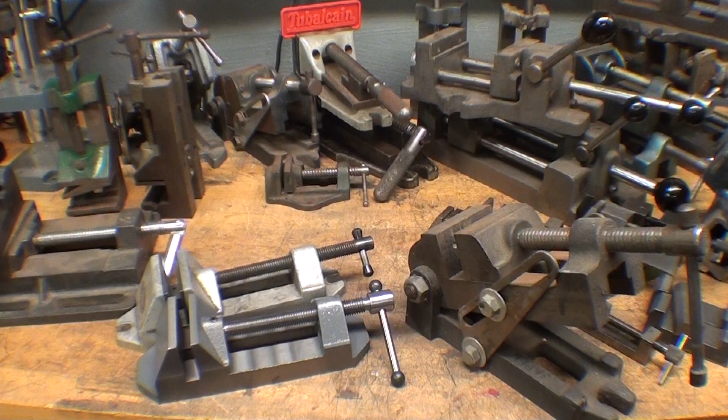Now this video is not meant to be a bragging session. If you think it is, turn it off rather than discourage me on it. I'm just going to yap. There'll be no chips made, but I'm talking about my...

Well, it's not really a collection, but I guess you could say that it is - I have 25 or 30 drill press vises, and I only need one. This was all brought about by my recent videos where I made the Struck Casting Specialties vise. I brought these out because there are so many different designs and sizes, and what I'm going to do here is just muse about them and elucidate the different types of vises that I have, and why I have them, although that will make no sense to you.

But, I've said many times, a man with many vices.

So let's get on with it, and I think I'll start with the larger vises so I can get them off the table. Now there are duplicates here too - there's always duplicates. Furthermore, if I went to a sale today or tomorrow, I would probably buy yet another one if it was cheap, because I am incredibly cheap and I'm not about to pay any money. None of these were purchased new - I don't ever buy anything new.

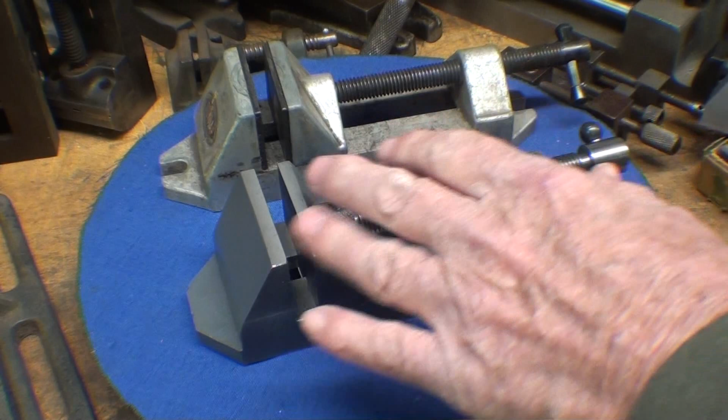Let me talk about the Casting Specialties vise first here, if I can get it out of the way, and I know I'm beating that subject to death, but I think most everybody in the Western Hemisphere has seen these three videos where I built this vise. But in the follow-up video, I discovered that I still had this Dunlap vise. Also, I told you recently that I had to go to the doctor, and the doctor examined me, and then he sat down at the desk.

He says, Mr. Peterson, I gotta tell you, you got a disease. You got Dunlap's disease. And I said, what? Is it serious? And he said, well, I don't know how serious it is. I said, what is Dunlap's disease? He said, well, your belly Dunlapped over your belt. Rim shot.

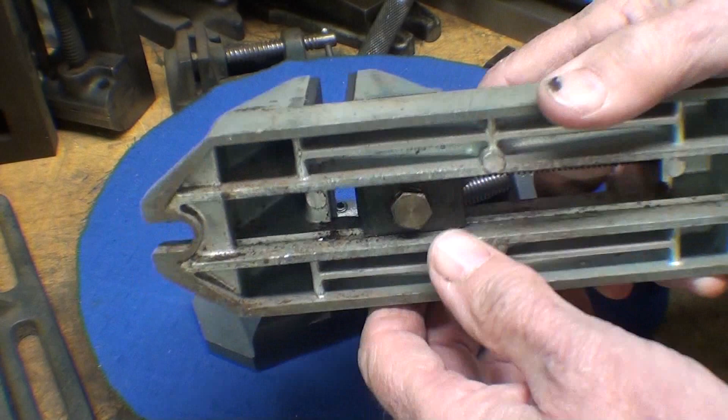Well, why am I showing you this cheap die-cast vise? This is zinc. I mentioned it in the other video, and you can see the ejection pin marks here. This is a repetition, really, but this vise could not be any more identical to this vise by Struck in appearance and dimensions. They are absolutely the same.

So I brought that up in the other video - which came first, the chicken or the egg? Did Mr. Struck copy this, or did Dunlap copy the Struck vise? I don't know. So anyway, I won't say any more about this, but I've had several of these over the years, and one of them was bent.

It was bowed. If you laid a straight edge across the bottom here - where's a straight edge? I don't even have one. Got 100 rulers and none at my... There was a great big bow there because someone had tightened it up so tight that they caused it to bend. It was Bubba, of course.

Notice that they probably knew that was going to happen and provided it with a very short little stubby handle where you couldn't get the leverage. But this would suit somebody in a small shop that does some work. I don't know if they make them anymore. Sears often sold Dunlap tools years ago as one of their cheaper lines, not the Craftsman line.

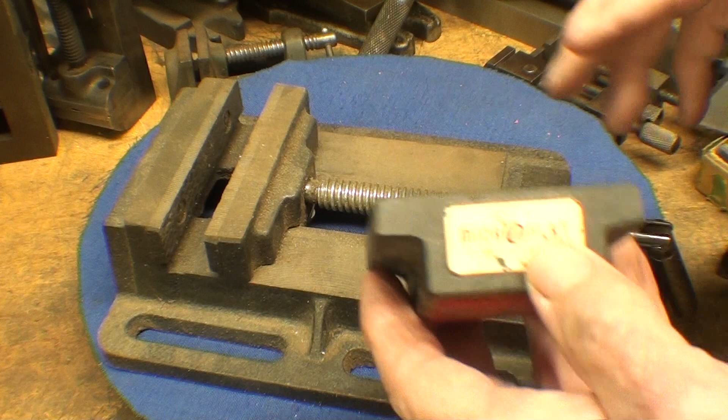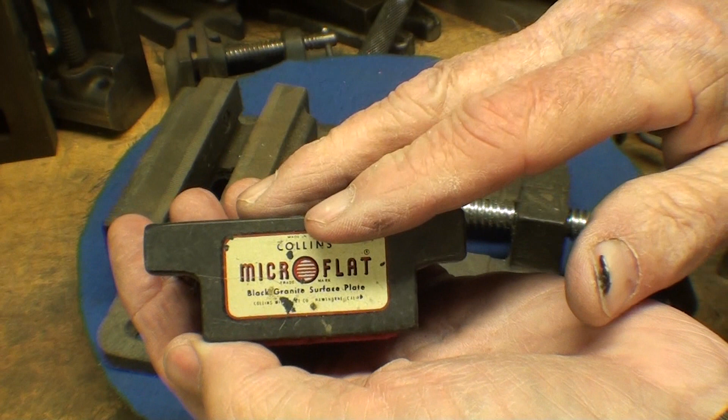But both Tom and Adam Booth showed one of these recently. I've had one of these kicking around for a long time. I didn't really know what it was. It's black granite, but I believe it's just meant as a paperweight, an advertisement for this particular company, Microflat. I didn't know there was an actual use for it - I just thought it was a desk piece, and that's what the felt is for.

And the 3 or 4 times I darn near threw it away. Well, enough on that, that's a non sequitur.

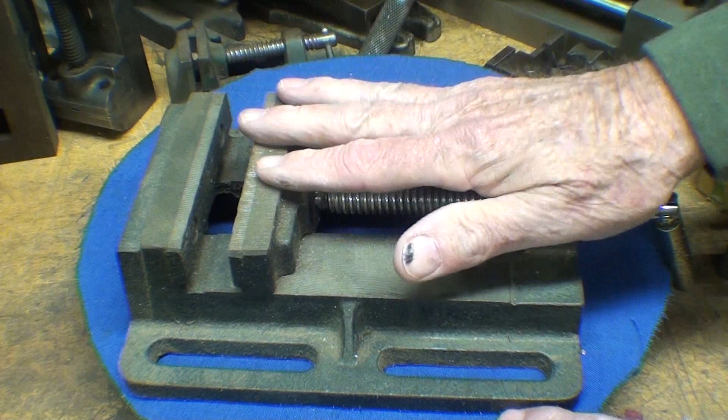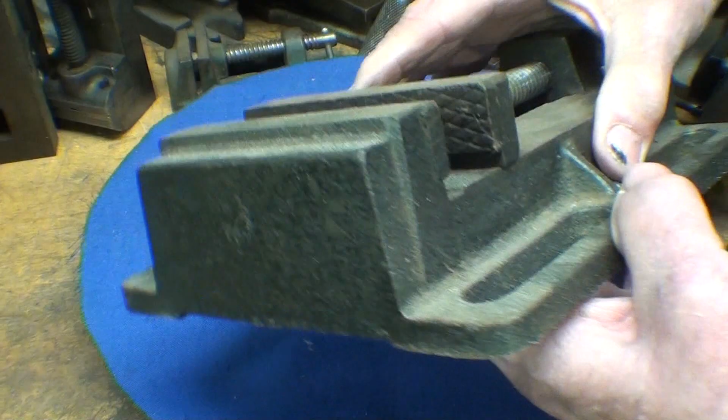You see these vises in every box store. They're Chinesium - I'm taking that word from AVE, pretty clever, but I don't like to steal his thunder. It's a 4-inch vise with an Acme screw and a nice handle, so that would be suitable. I think this is a $15 or $20 vise, and it's even got replaceable jaws. I hate it myself, but I haven't had the nerve to throw it away yet.

I only have a couple other Chinesium vises, so I'll show those and then we'll move on and get these heavy ones off the bench. This is a 4-inch, pretty much the same as a 3.5 inch, and that one still has the price tag on it from when I bought it at a garage sale.

You may remember this from another video where I did a job with it - these are tilting vises. When I got done with the job, the work was scrapped because this vise wasn't square, or I forgot, or maybe the protractor portion on it was no good. So this is an absolute piece of garbage. They obviously didn't check it at the factory, and they didn't care or didn't know any better, but it really is a piece of junk they should be ashamed of.

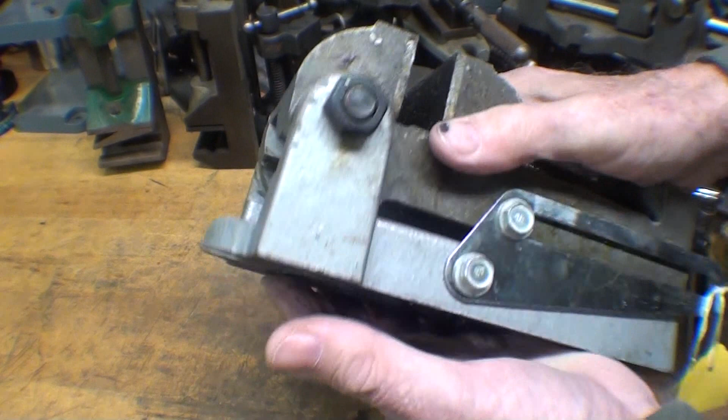I've never checked this one for accuracy. This has about a half inch diameter screw, and this one is larger, probably 5/8, but it may well be metric too. But if you want a tilting vise fairly cheap, those are the ones you can get. If you bought an American one, it would cost a king's ransom.

Sometimes you find these vises also on a 2-axis setup - I'm going to show you one of those later, American made though. Anyway, I don't like these. This one definitely is going to a flea market or tool sale. I've got to get it out of here before I use it again.

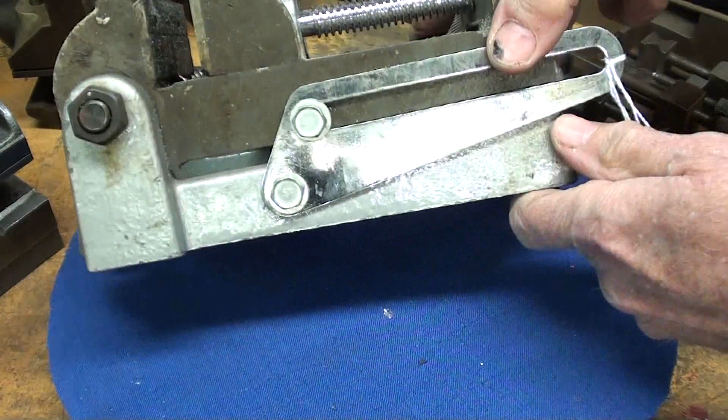One other thing on this vise - they did know how to make it pretty. They took the time to plate this piece, plating the screw and the handle. So on the store shelf, for the uninformed, that looks like a vise they maybe had to have, and it would have been priced right.

Okay, the ubiquitous Palmgren vise - I thought I had a bunch of these in this size, but I don't. I really only have one in the genuine Palmgren brand, and it's 2.5 inch, and this really is a wonderful little vise. A lot of people modeled homemade vises, or other companies copied this because it's such a nice one. I always liked Palmgren. I'm not sure if they're still made in this country.

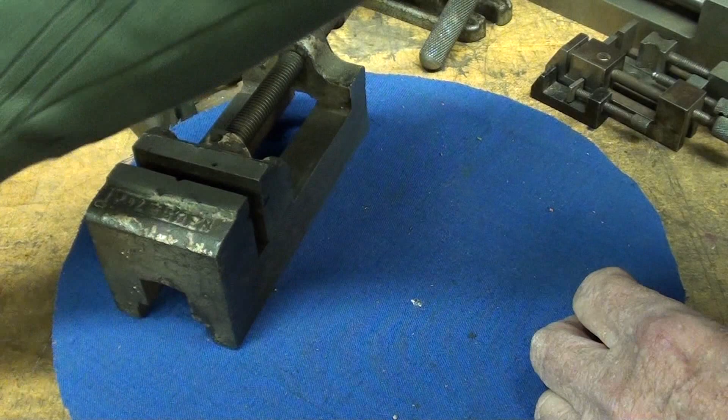And here is a vise I've had for many years - it's Japanese, old enough to be Japanese, not Taiwanese, and this is very well made. In fact it's one of my very favorite vises here in the Tubalcain shop. Let me say a couple other things about Palmgren, and some of this is a repeat - I know it is. I found it's necessary to repeat some things because people don't go back and watch older videos, and I have constantly new subscribers, new viewers.

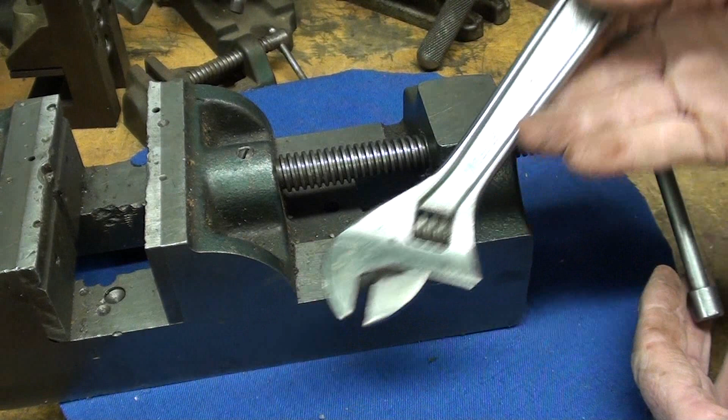Probably the same thing underneath this fixed jaw here, and that's why that jaw has an angle on it, so they didn't have to get into the corner and worry about that, because they were making these by the thousands. And this is a heavy vise, and it's really nice.

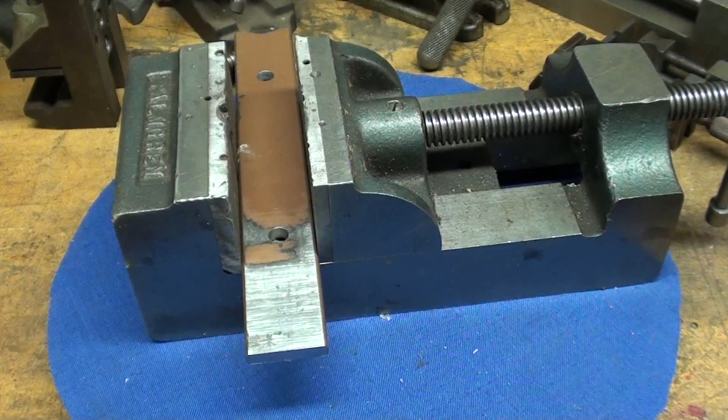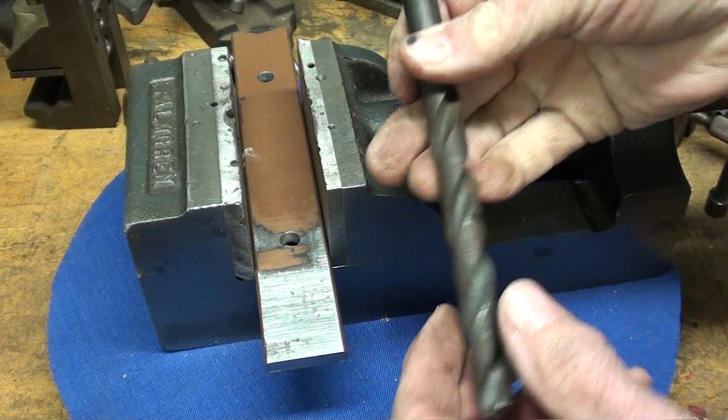In my many long years of experience in a school shop, I have seen kids - this is kind of humorous if it wasn't so pathetic - drill through relatively thin work like this, through the work, through the vise, and then through the drill press table. So even though it's 1/4 inch stock, they drilled a hole that was 3 or 4 inches deep and left a path of destruction behind them that is still there wherever that drill press is. Still got a big hole in it.

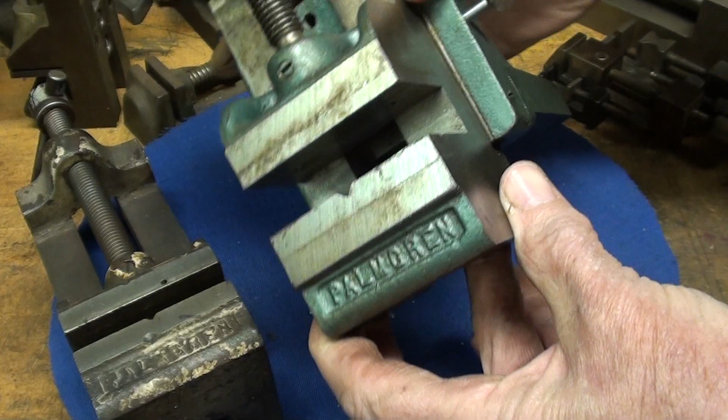Some of you may own this Palmgren milling attachment for your lathe, and they essentially used their ubiquitous vise here and adapted it for that, so they didn't need to make a totally new vise. Parts bin engineering is what I call it. Although this is a nice attachment, I'm not really criticizing it.

I like this Palmgren vise, and it's a little bit bigger than the other one. It is 3 inches, and it's got the lugs on the side so you can bolt it down. Nicely made. I liked it so much I got 2 of them. Or I guess, no, I'll take that back. I liked them so much I got 3 of them.

This particular one I can hold in the bench vise and do small work on it, and the jaws, of course, are not going to mar the work because they're smooth jaws. And those are nice. They've never been - well, I started to say they've never been drilled, but this one has a couple pecks in it. I didn't do it. I didn't do it.

They plated this one, and this one is not plated. Notice that this one is not cast with the Palmgren name, probably because they sold these to other companies and they could put a decal on here, Craftsman or just about anybody that wanted to buy them as their own brand. So I think that's why I'm deducing that they took their name off of it. And I do like the hammer tone paint.

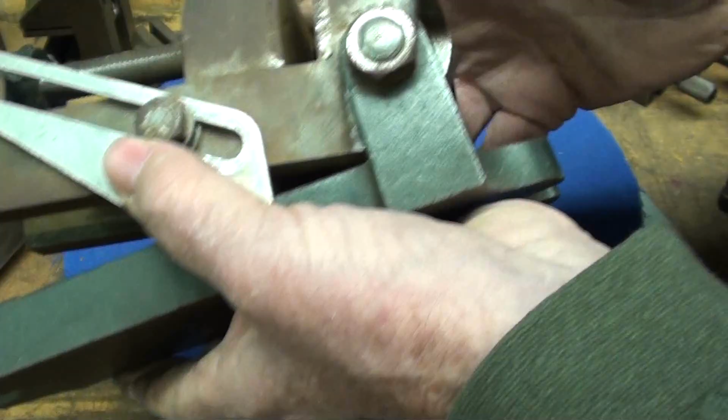But what is not nice is that, if I can find it on here, oh, they got a protractor on there, but it's bordering on the worthless because it's small. It's too small. The larger the protractor, the more accurate it's going to be. So I would like to have a protractor that's 4 inches in diameter, but of course there's no room for that, and it would be only semi-accurate and get you in the ballpark. You would use a Starrett protractor if you wanted real accurate settings.

Now, a lot of people copy that vise as well, and here's one that is Chinesium.

Got the heck drilled out of it here. Even there, you know, how'd they get holes over there? And this protractor is still small, but it's applied in a different manner. It is cast iron and certainly usable, and they plated that screw for some reason. Oh, here's a point I'm trying to make: in this case, they started with smaller stock. The diameter here is smaller than the diameter of this, and there's still one other one here.

I guess I'm not done with tilting vises here. I thought I was, but I bought this a couple years back at an auction. It was $15, more than I wanted to pay. And really what I wanted - I don't care two hoots about the tilting mechanism. I was going to take it apart and throw it away because this little vise is absolutely darling. And I wanted to use it just as a general - it's 1.5 inches. And I know that Palmgren probably made that one that small, but I've never seen it.

Palmgren had, maybe still does, a complete catalog with vises and other work holding devices, rotary tables and things like that, so they aren't a one-line company. They were pretty awesome. I guess they're still in business.

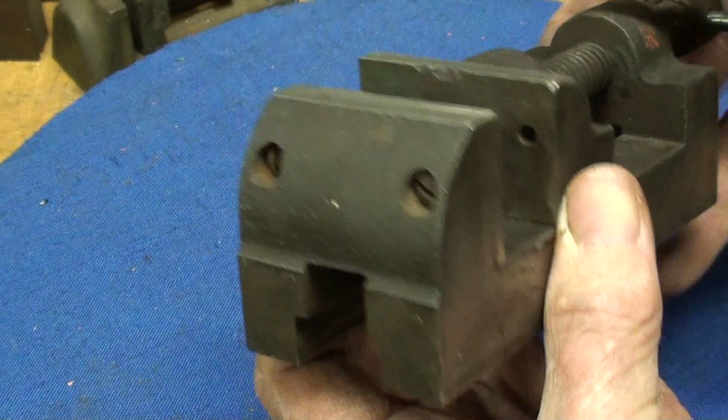It is missing one of the jaw plates, and someone said, well, you're a machinist, make one. Never got around to it. The shoemaker goes with holes in his shoes, you know.

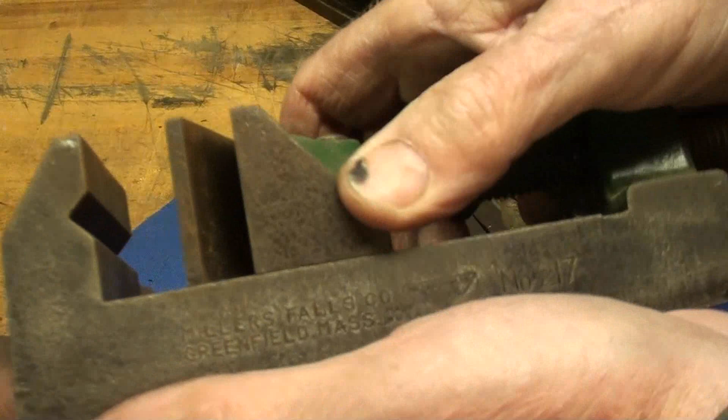Here's two identical 2.5 inch vises, and they're made by Miller's Falls, or at least one is marked as such. Some of you may not be familiar with that brand, but boy, they made everything from micrometers to all kinds of woodworking tools, and yet they're long gone now. Notice the groove here, right in the casting, not in the jaw, and it has a swing jaw.

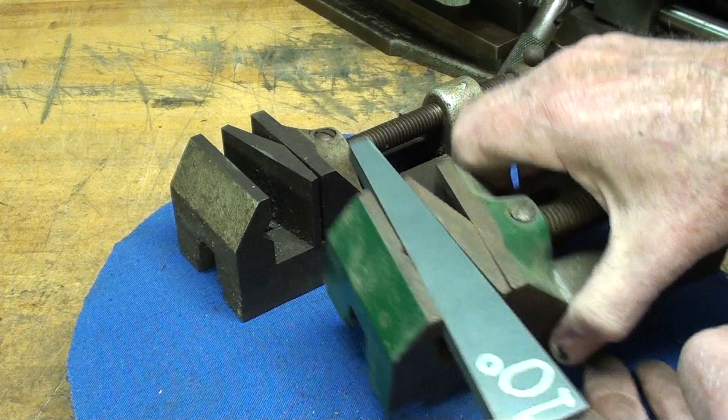So you can hold tapered work or straight work if you are of a mind. For instance, here's 10 degrees, and I can hold 10 degrees. Now, I was at the Grizzly store in Springfield, Missouri, and they sold a device to do this, but it just fit in any other vise. Maybe it was a bench vise, and they had jaws that would swing like this. They pivot, so that's kind of clever, I think.

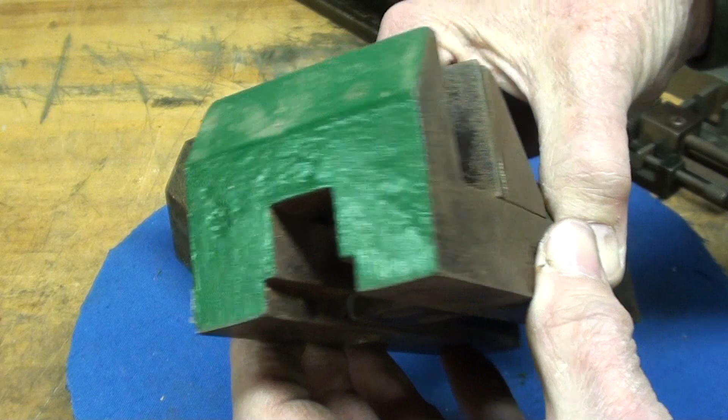So that's a very, very old vise. You can see it's pretty dusty. I doubt I ever used it. This one's a little better. I don't think it's got holes drilled in it, and I'm not sure what the mechanism is for that.

Oh, both of these vises have holes drilled and tapped. At first I thought, when I looked at one of them, that somebody had defaced it. But some of these vises came with a stand, and you could screw the stand onto the bench and use this as a bench vise. Some of those stands also tilted or swiveled and did different things, but that probably was at extra cost.

But that's what those tapped holes are for. This is also one of my favorite vises, although if it's my favorite, how come I never used it? It could be screwed down to a bench. It's got an Acme thread, of all things. For such a tiny little vise, how wide is it? Looks like it's about 1.5 inches.

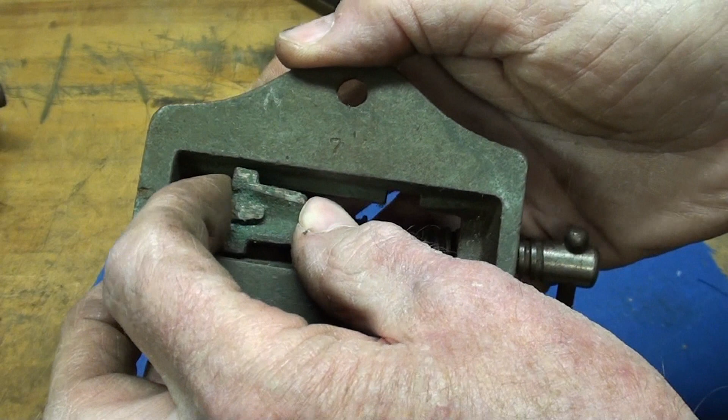Yeah, and on the bottom it's very cheaply made, because that keeper there is just inserted without any machining, in these little, almost looks like a T-slot there that allows you to disassemble it.

Oh boy. What does that say on there? Can't read it. I cleaned this up and it says Stern, Syracuse, New York. And now I remember that name. They were on other clamps and woodworking devices, older stuff. They didn't even machine the bottom of that, it's just rough cast. So this would have been a very, very cheap vise, but for some reason I like it.

All right, now this vise I do not value at all, and I really had to go out in the garage and get it. It's on my welding bench, because this is one that I'll use to hold metal if I'm welding. But now upon further examination, it's a pretty nice vise. Crudely made, with machining marks there that they didn't bother taking out, but this is a nice vise.

And I love these big balls.

Why am I spending so much time on this? Well, probably about 80% of all machining is drilling or in some way forming holes. Not always on the drill press, but think about the quantity of holes drilled in any given product. So holding the work is really important.

All right, let's set that aside and talk about some other vises here.

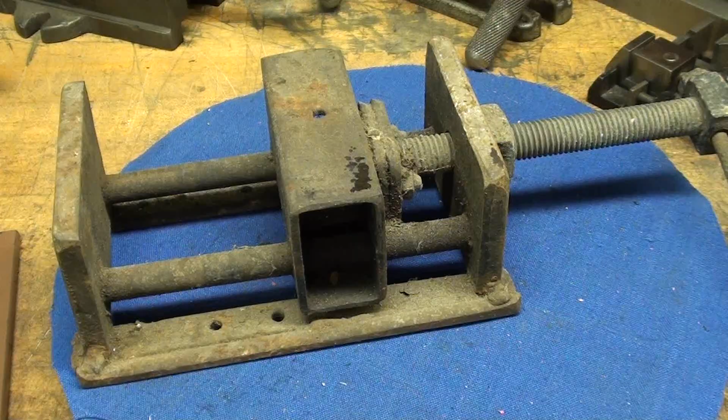I bought this at a sale last summer for $1, and that's about 90 cents too much. Why did I buy it? It couldn't be any uglier. It's homemade - threaded rod here and a nut welded on. It would have to be cleaned up, but I have no intentions of doing that, and I still might throw it out. But why did I get it? Because I thought I should use this as a project and come up with a similar device that's a fabrication, a weldment, for those who don't have machine tools but have a welder, a saw, and a drill. I still may do that someday. There you can see the guide rods, a piece of tubing and a flat iron. Whoever came up with this was pretty resourceful and clever.

I know there's some ladies watching, either alone or with their husbands, and they're making fun of me - this guy is nuts with 30 vises. Well, I dare you to tell me, ma'am, how many pairs of shoes do you have in your closet? So this is no crazier than somebody who has a lot of shoes.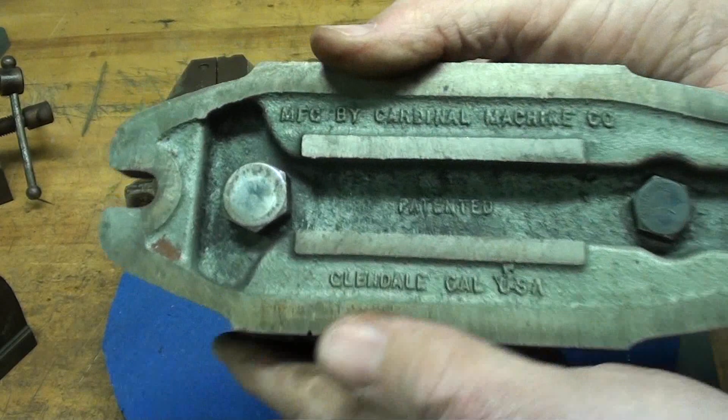These are some of my favorite vises, I think they're the cleverest. They're called a speed vise, made by Cardinal Machine Company, Glendale, California, and I believe you can still buy these. They're quite expensive - this is a 3-incher and this is a 4-incher. Maybe they made other sizes too, I don't know. But the thread is a buttress thread.

I remember them having this in a shop I worked at many years ago, and I thought that was so neat. So that's a buttress thread, so you can just drop that into the nut - it's a half nut. It can quickly be slid into any position, hence the name, and tightened down. It's got a nice knurled handle on it. They just went the extra mile on this one - there's no holes pecked in there.

Should take that to school. The kids would take care of that.

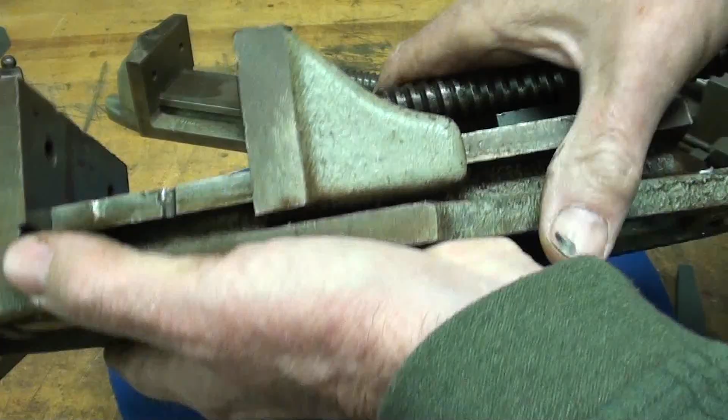This one, 4-inch, that's a heavy vise. Oh my gosh, surely your sins will find you out. I hope I didn't pay much for that. But isn't that awesome? Notice that this jaw is a separate piece and bolted on, and the other bolt on this end apparently holds the half nut on, which could be replaced because that probably would wear.

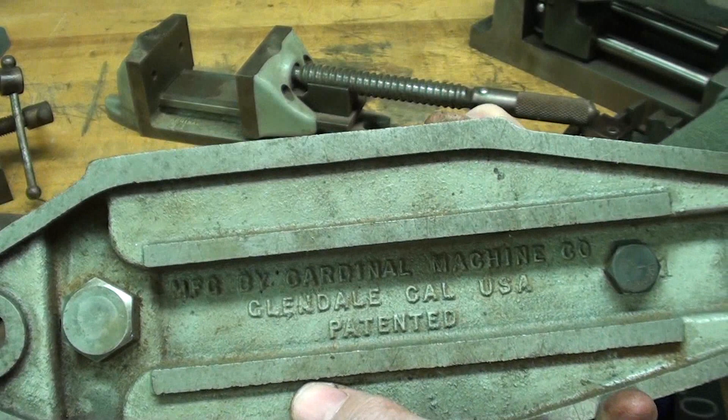The only thing I don't like about this vise, well a couple things - first of all, chips collect here and get packed in, and until all of a sudden it's just stripping out, so you have to stop and clean that with a scriber. One other thing is there's no through hole here to drill through, so this is just inviting people to drill into it. But at least they didn't drill all the way through, which is kind of surprising. Sometimes you should have enough sense that if you're drilling steel and at some point you're not getting curly shavings anymore but cast iron dust, that should be your first clue.

Okay, I changed my mind, this is my favorite kind of vise. This is a Heinrich - you've seen me use a Heinrich cross drill jig many times. I like those jaws because they're step jaws that allow you to hold the work up high. And again, these are hardened rods, so should you drill through the work, there's a tendency for the drill bit to deflect or possibly even break or cause sparks, and then you realize you're not going anyplace with that. But that's nice, and these are replaceable jaws.

Now, how does the mechanism work? I did take one of these apart once to examine it, but I don't remember. It's just a patented locking device, and they've used that locking device in many of their other products. In fact, you can buy just this piece here along with the rod and the handle, and I think there's bolt holes in it that can be used in various other drill jigs used in factories.

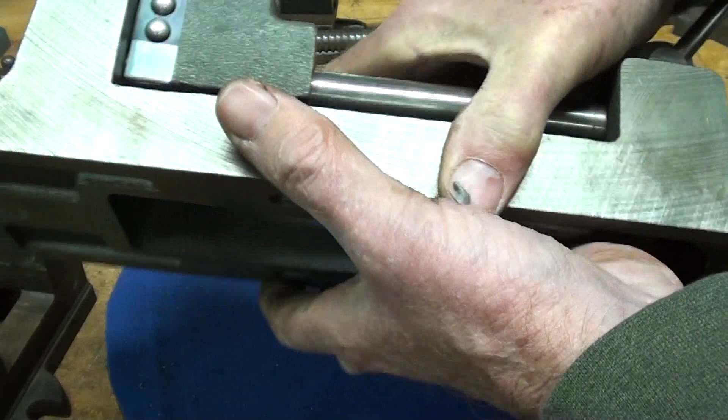There's the mechanism. Oh, I remember now, it's adjustable with that little knurled knob as far as the tension, because you want that when tightening your work to lock down all the way, not be in a position where you can knock it and the work comes loose. This one came with the optional hardened jaw, which clips right in and stays nice with those springs. This is a quality product.

I bet this is a $200 vise. It's quite heavy. Heinrich. Put that on your wish list.

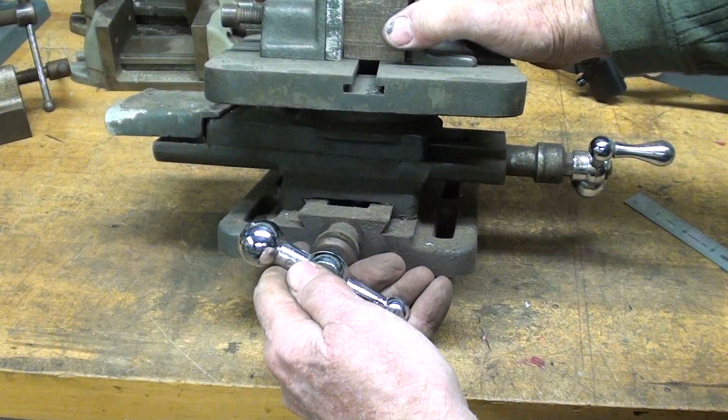You know, I almost forgot to show this vise. This is an Atlas product. They probably sold it in the Craftsman catalog years ago too. It's a 2-axis vise with dovetails and cranks. We had one of these when I was in high school. In fact, this is the exact vise that I used when I was a student and made that Stuart engine almost 60 years ago.

So you put your work in here, and then these cap screws can be tightened. There's T-slots here, and then this is tightened. A little bit awkward, but then you had very accurate positioning for that. Back when I did that, we didn't have vertical milling machines, so this in effect was giving the accuracy almost of a milling machine.

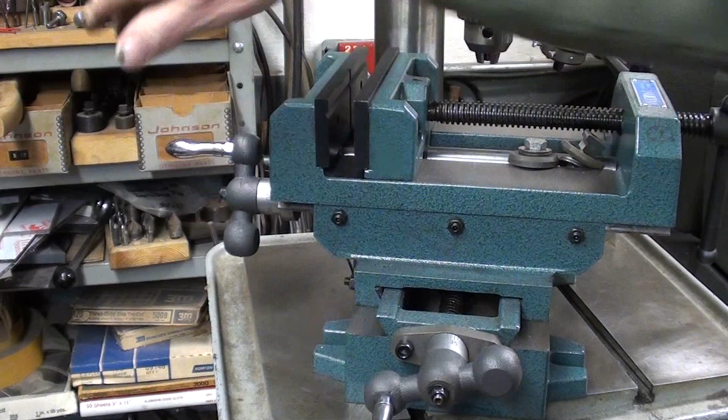They're graduated dials here in thousandths, although these are corroded and almost impossible to read. That's actually the subject of a future video, where I talk about enlarged dials like this on my Atlas lathe. But this is an Atlas product, and these are kind of rare.

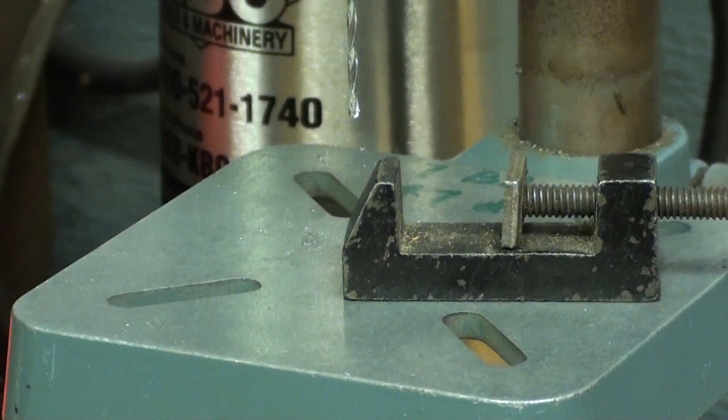This one is perfect because there's no holes drilled. When I bought this—if you watch one of my old videos where I bought that Atlas Craftsman lathe—this was mounted on the cross slide of all things by the former owner. What he was doing with that, or if it was meant to be used on a lathe as well, I don't know. But anyway, that's the Atlas.

Let me show you just one more thing on this Atlas vise here. Do you recognize this? That looks exactly like the cross slide from the Atlas lathe, and in fact it probably is. This guard looks familiar too, and there's a protractor over here. I never have actually cleaned this up since I got it.

I still got all that grime from the farm on it. It was an unheated building, but yet this is something I value for some reason, I don't know why. That'll fit on there the same—whoops, I just dropped one of the pins—the same as the compound attaches to the Atlas lathe, and it goes right over that dovetail. How awesome is that?

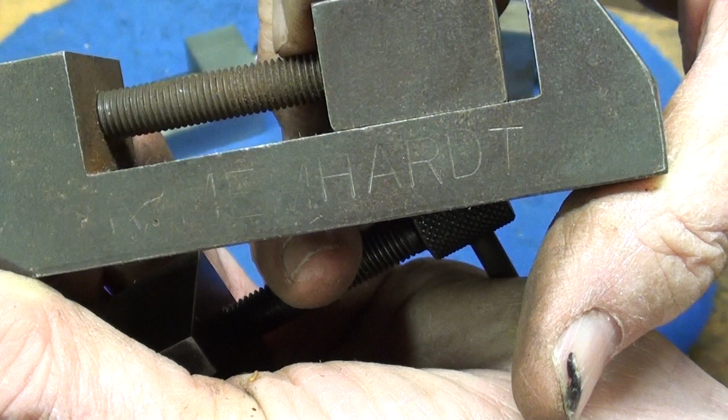Now this is Wilton, and Wilton makes a complete line of vises, I believe, still, but I think they're imported. Remember when Jim Kohler gave this to me a few months ago? This would mount right on a drill press, and this is a very heavy vise. I think they made it in a smaller version too. Again, 2 axes here with graduated collars, and this is meant to be bolted down, of course.

And this is, I think, a 6-inch vise, and this is brand new. Jim gave that to me brand new. He said he never had used it, and it was just in his way. So here it is on my Delta drill press. That's awesome—thanks again, Jim, for that.

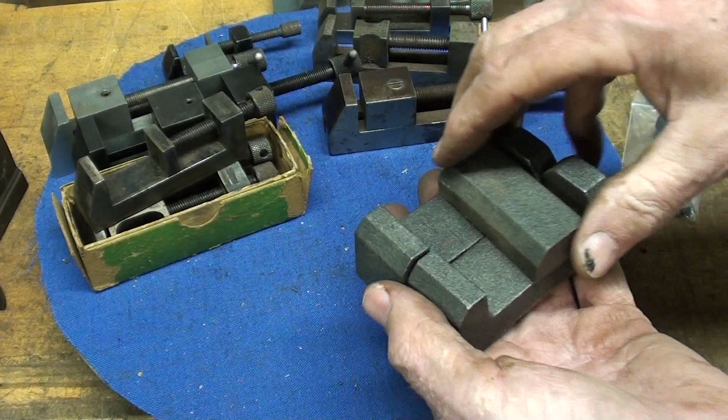These vises are all what you call Toolmaker vises, and some of them are homemade. Now this particular one here—they were sold in pairs—is a Brown and Sharpe, but it's missing the jaw, and I only got one of them. It looks like somebody drilled a hole; I don't think that was factory. But I wish I had a pair of the Brown and Sharpes—I only got the one.

And here's a pair in the original box, the Starrett box, old enough to where it's not the red box, but those are Starretts, and I do value these highly. Remember, that jaw comes off—whoops—and it's held on. See, there's a little ball there with a spring in it, so you can change the jaws, and they're meant to swing like that. So I got a pair of those in the original box. That's awesome.

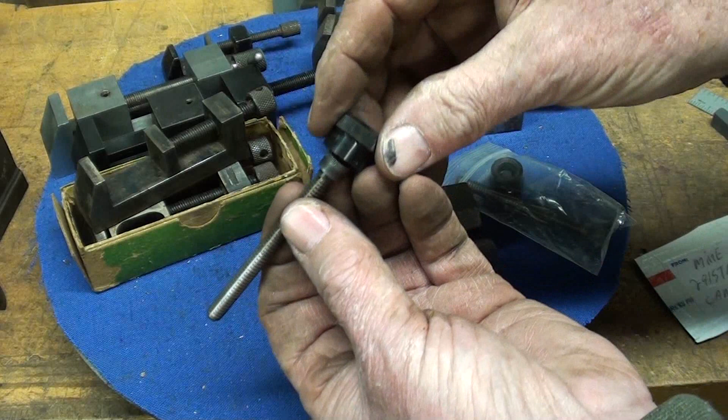This little one—did I ever tell you I like Starrett tools? That's the smallest vise I've got, and I suspect this is a 50-cent vise, or maybe even a boy's vise, but it does come into scale with a little drill press like that, doesn't it?